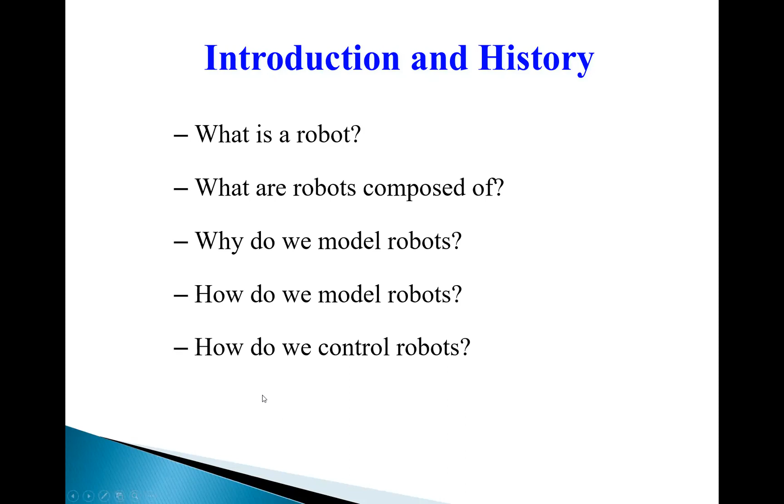What is a robot? What are robots composed of? Why do we model robots? How do we model robots? And how do we control the robot? That makes it understandable how intelligent and smart robot learning works, and how they work.

The word robot was introduced in 1920 by a playwright, Karel Čapek, a Czech playwright, in a play in 1920, and on January 2nd, 1921, the English version of it was introduced to the world, and the word robot was also introduced in this play.

Basically, after the First World War, skepticism arose after using machine guns or some equipment and high-tech systems at that time, which was the context for this play. And the playwright was going to somehow criticize that modern technology.

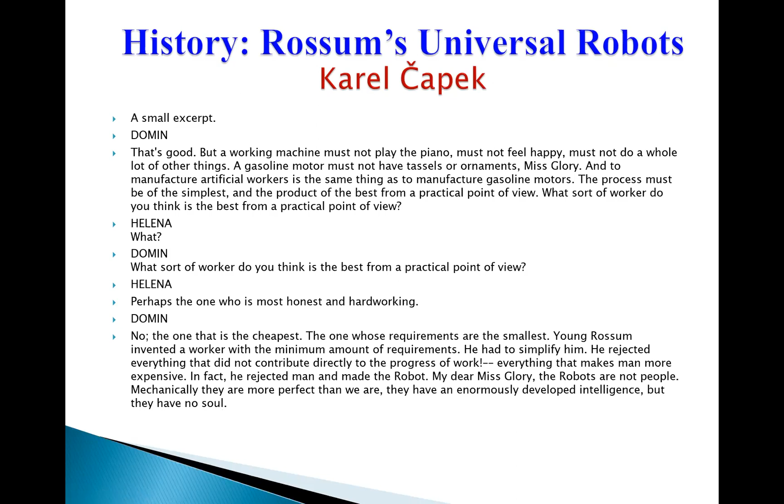This is how a robot was introduced to the world by Karel Čapek, Czech playwright and writer, in Rossum's Universal Robots. You can search this if you need more information. Recently, in 2018 or 2016, a paper was published about this play, which is still useful not only from a literary point of view, but also because in that play Čapek laid down the fundamentals of a robot: how it should be built and what the requirements are for that and how it should work. These are things that have been revisited in this playwright, and there are papers about this, continuing even until recent years.

It's most likely a combination of 'robota,' meaning obligatory work, and 'robotnik,' that served to create and introduce the word robot. Most real-world robots today do perform such obligatory work in a highly controlled environment, like factory automation, for example car assembly. Of course, this was valid 10 years ago, maybe even 5 years ago, but it's not valid right now.

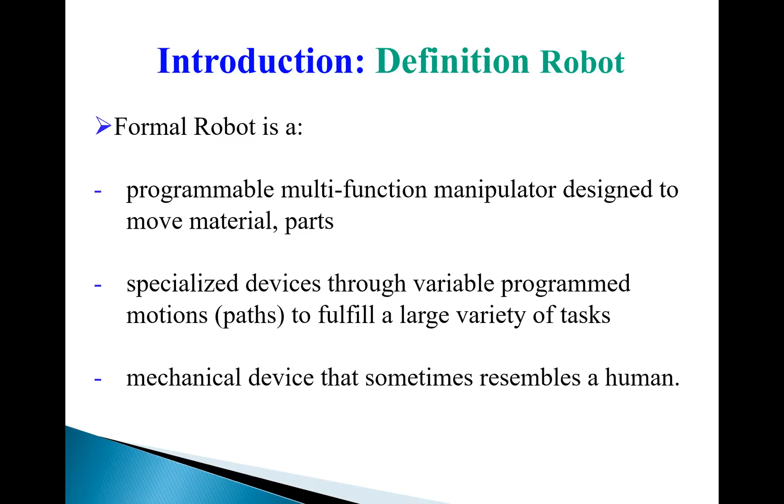It's not complete. There are many colleagues and people working in this robotic community asking for a better, formal definition to be updated and renewed. So what types of robots do we have?

Introduction to categories of robots: we have fixed robots and mobile robots. Fixed robots include parallel robots, and I will show you serial robots. Mostly in industry we have fixed serial robots used to work in industry. Mobile robots include space robots - many of you have seen NASA's Mars rovers, Spirit and Perseverance, and other types of space robots and humanoid robots.

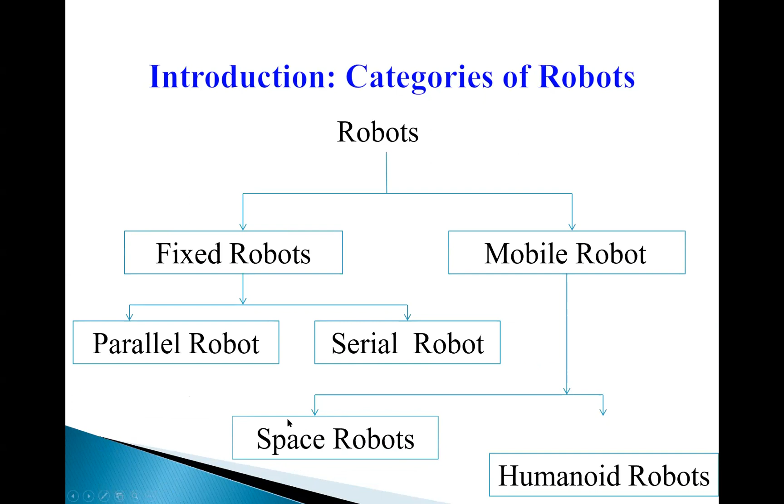Fixed robots include rigid link robots, exactly like a human arm, one hand. As you can see, most of them have 6 degrees of freedom, 6 motors, but the human arm has 7 degrees of freedom: 3 rotations in the shoulder, 1 rotation in the elbow, and 3 rotations at the wrist - roll, pitch, yaw. That's 7 degrees of freedom, but the industrial robot is 6 degrees of freedom. The Canadarm is also one such robot - it has 7 degrees of freedom, working in the International Space Station. I will touch on this: why do we need 7 degrees of freedom versus 6 degrees of freedom?

Another type of rigid link robot is the parallel robot. Parallel robot means more than one branch. Sometimes we need a robot with higher stiffness for some applications - a one-link serial robot, like a human arm, is vulnerable and can vibrate when it's moving fast.

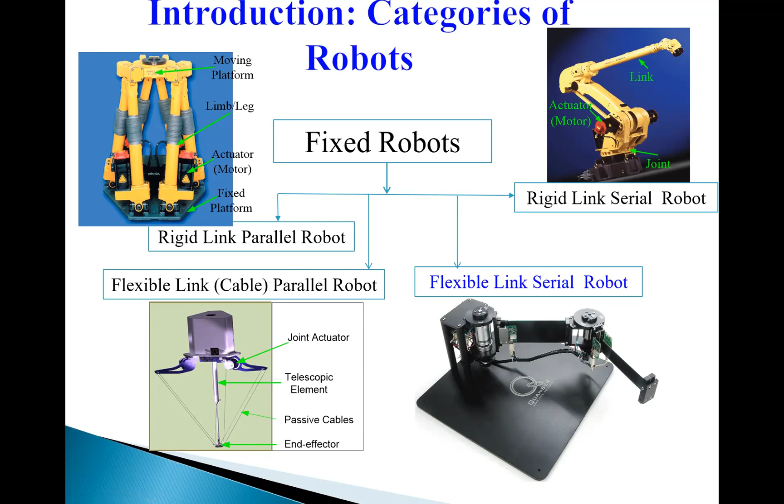What? No, excuse me. Sorry, you go ahead, doctor. Yeah, could you mute your mic? Well, I think Mr. Muhaqiq, you can mute the audience. I cannot.

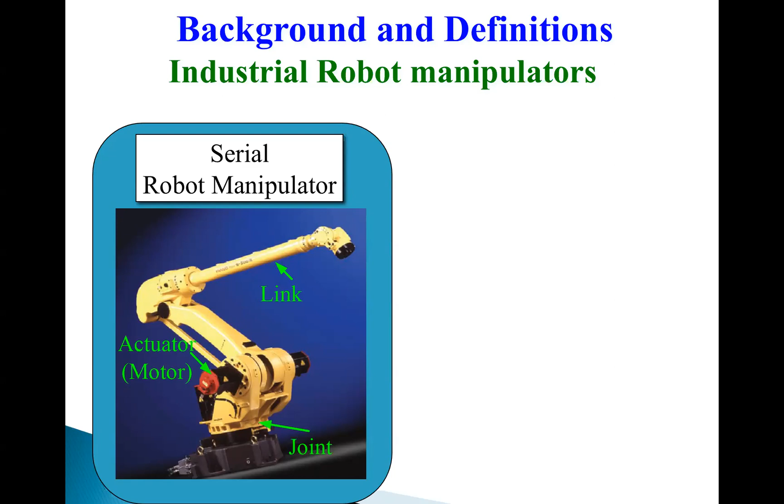This is what you have. You are more familiar in news and factories if you had the chance to visit automotive assembly line. These are the robots used in industry for pick and place, for many different applications. And this is another type, the F200 Fanuc robot. As I mentioned, this is a parallel robot, has smaller workspace, meaning the points it can reach in space is smaller than the one on the right-hand side.

We don't see the clip, Doctor. Oh, sorry.

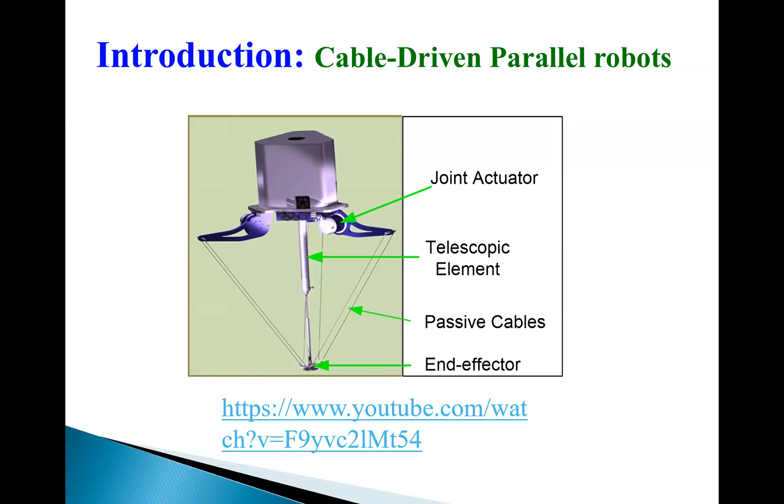Deltabot can operate at a rate of 120 cycles per minute. The motors that power Deltabot are high quality and have zero backlash gearboxes. The suction cup is one of many picking devices available. It's positioned to pick and orient objects by a central rotating shaft equipped with a universal joint. Deltabot can operate at a rate of 120 pick and place cycles in automotive industries.

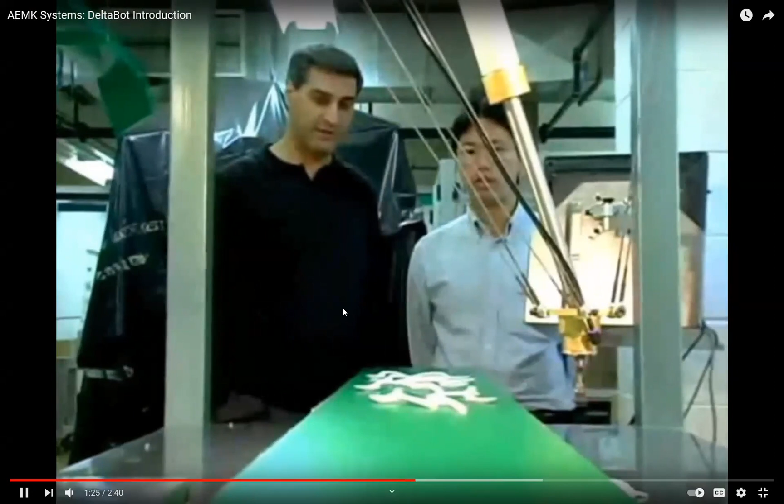You are familiar with this face, I'm sure. This is Professor Amir Khajepour. This robot is designed and built at University of Waterloo, and AEMK is one of the spin-off companies of University of Waterloo.

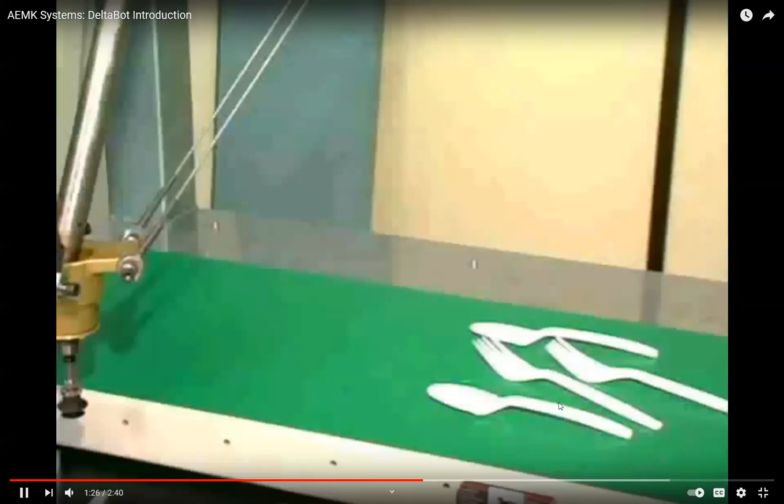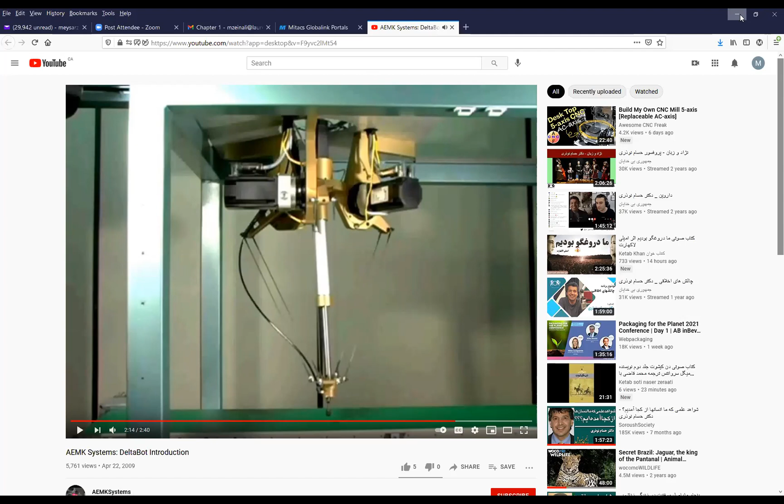You may think, why do we need to replace the rigid links with cables? For faster motion, we need lighter moving mass. That's why researchers started replacing the rigid links with cables. And also, another motivation behind this cable robot is to have a much larger workspace.

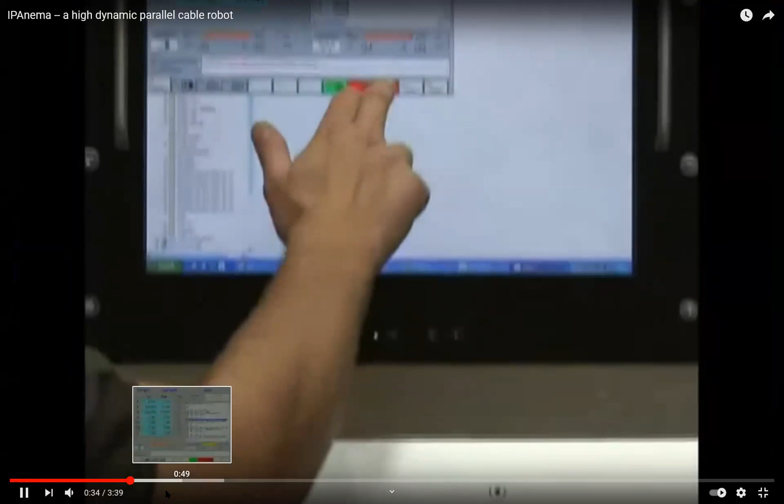You can see this is another type of cable robot. This covers a 100 by 100 by 100 meters workspace, and it's designed and built by Fraunhofer for installation of solar panels in a big project.

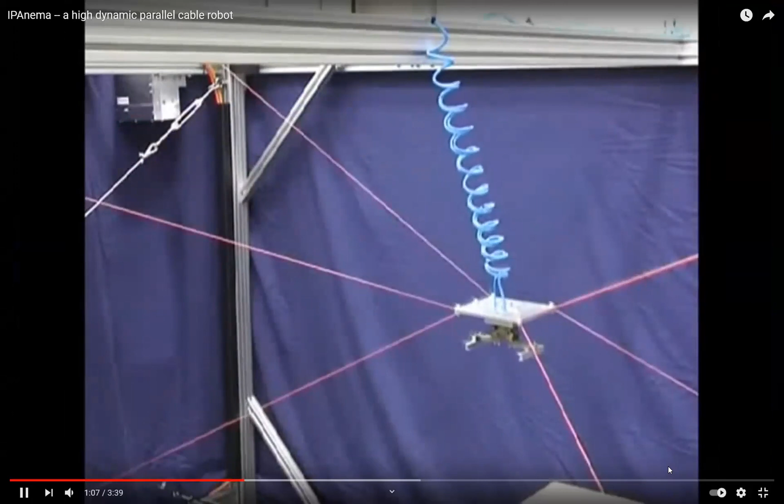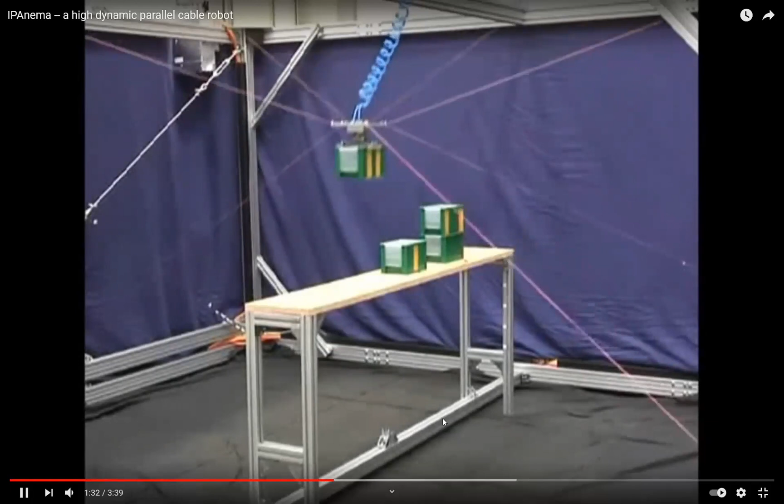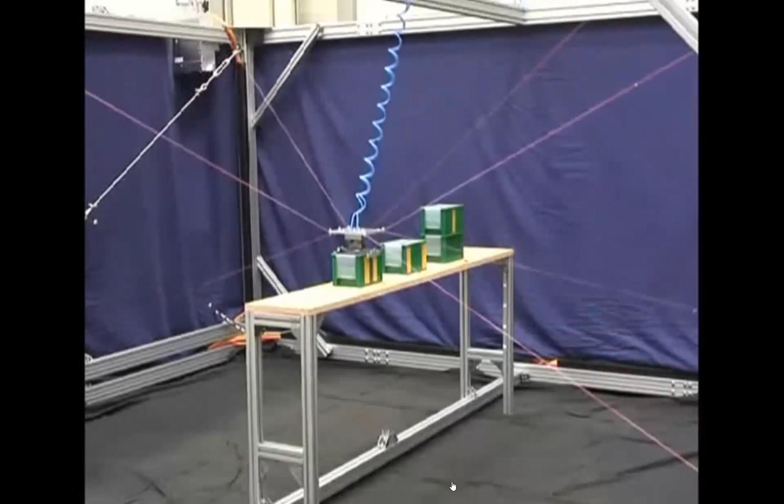You can see that all the links are cable, and control of this robot is quite difficult, but despite having very flexible, hyper-flexible links, you can see that there is no considerable vibration. The robot can pick and place and do the same job the rigid robot used to do, but can cover a larger workspace, meaning the area the hand of the robot can reach is much larger than the rigid robot.

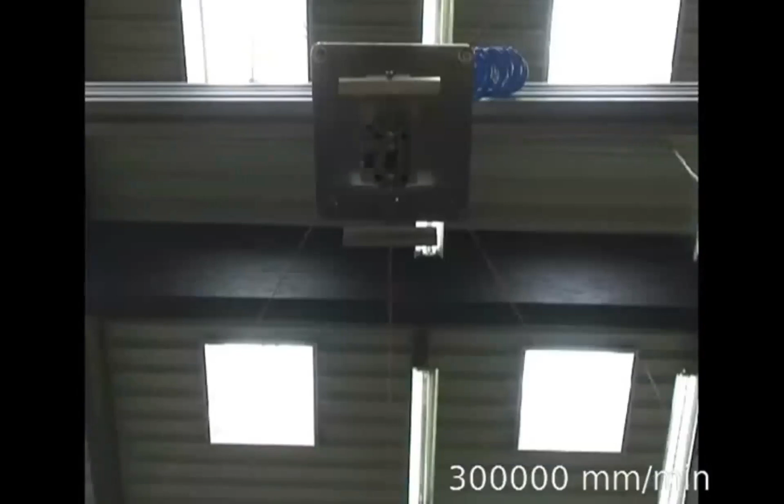You can see here how fast it can move, and please see there is no vibration. The hand is not vibrating despite the very high speed, which is not possible with rigid, heavy-link robots. That's why the rigid links are replaced with cables. But winding and releasing the cables is more difficult and makes the control more difficult.

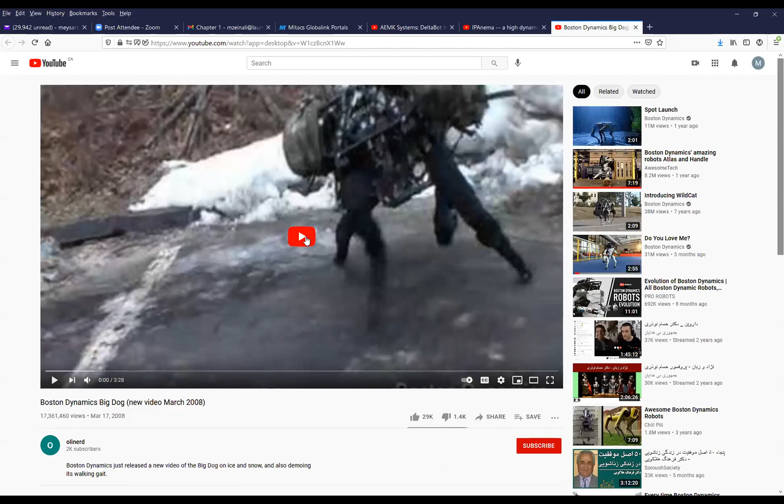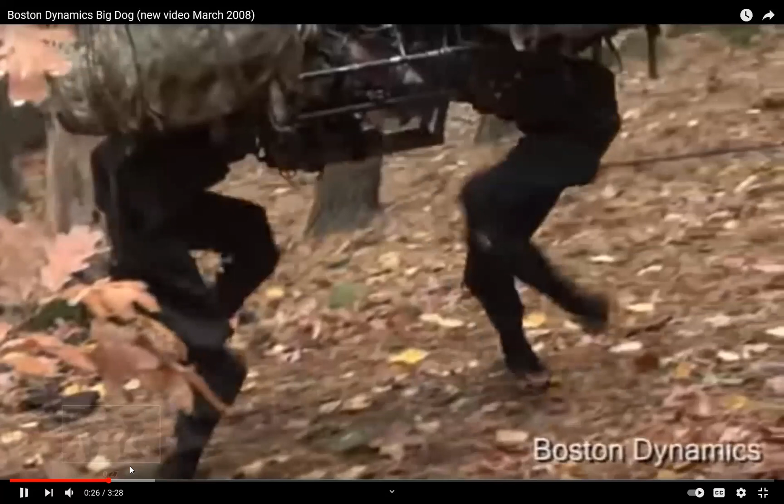Four-leg robot, but please look at the legs. Each leg is a two-link robot. That's why most of the experiments in many robotics labs are conducted on two-link robots. We test our controllers and algorithms on two-link robots, and we verify whether it's working or not.

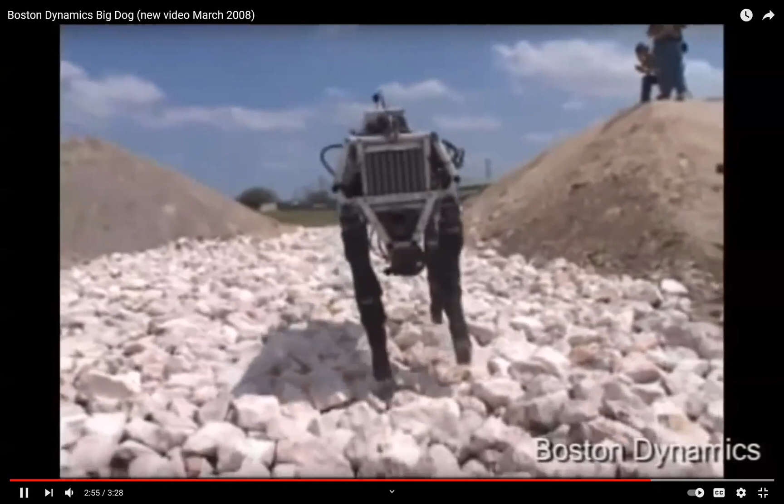You can see it can carry 150 pounds - the early version of this robot - payload on very rough terrain.

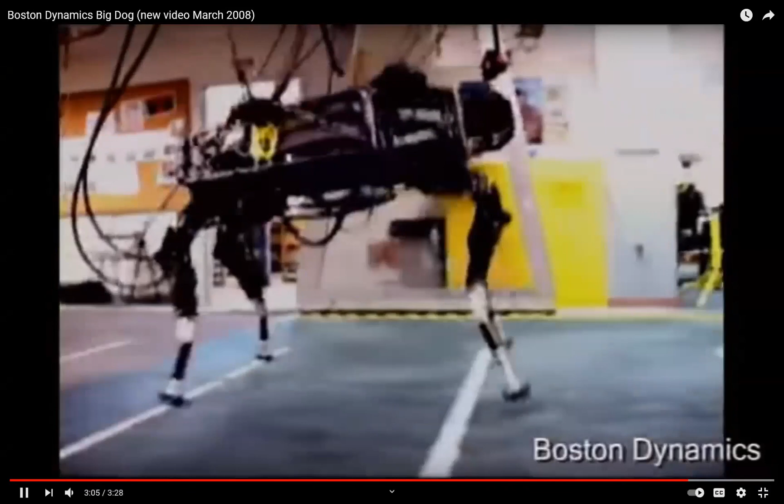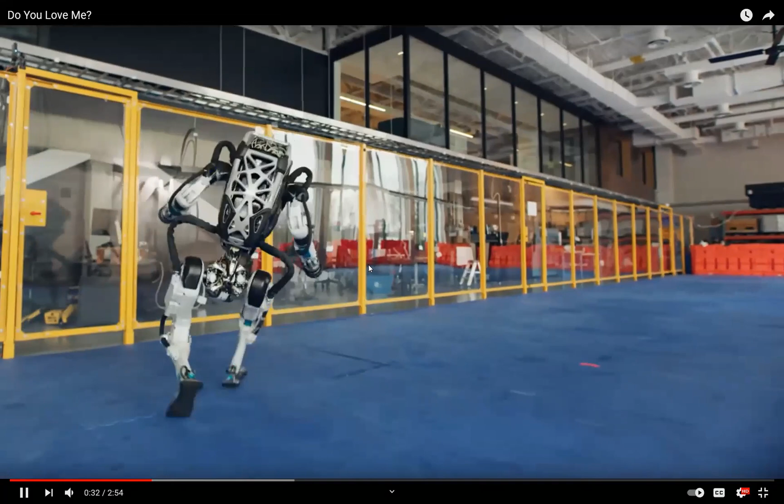Another robot built by Boston Dynamics. The main question is how this robot learns different motions, or how they work, and how we train this type of robot.

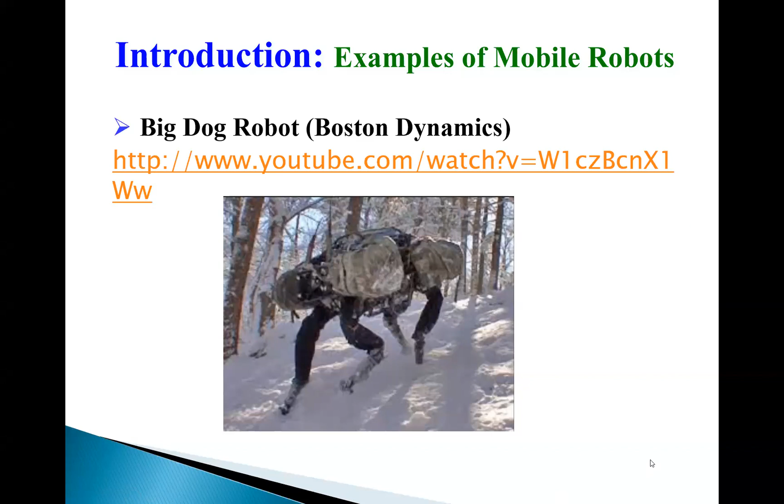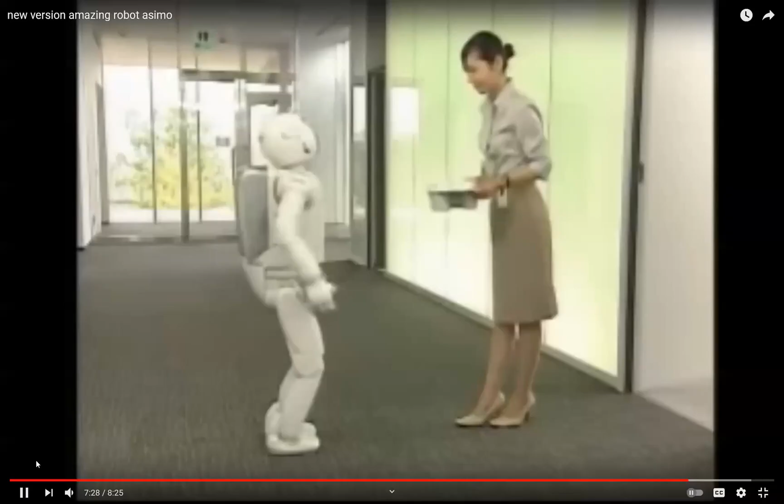You can see how it's moving. It can run by 5, 6, and in the current version, I think it can run at 9 kilometers per hour.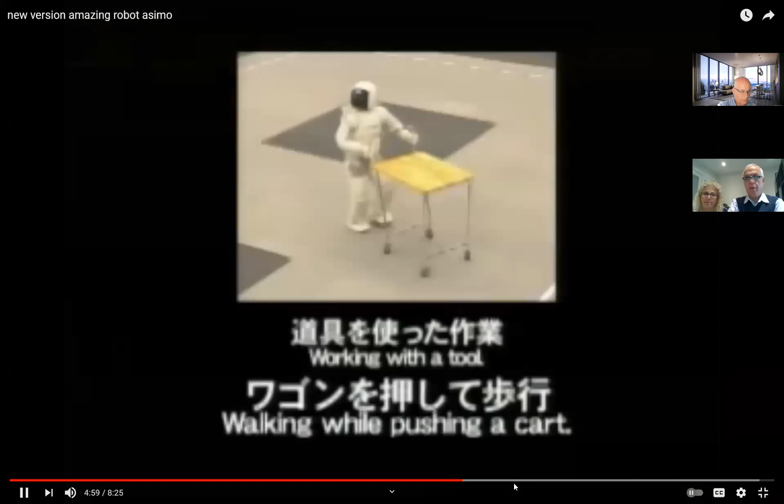It can serve in office, at work, and for elderly people in hospital. So it has a variety of different applications, many different applications it can be used for.

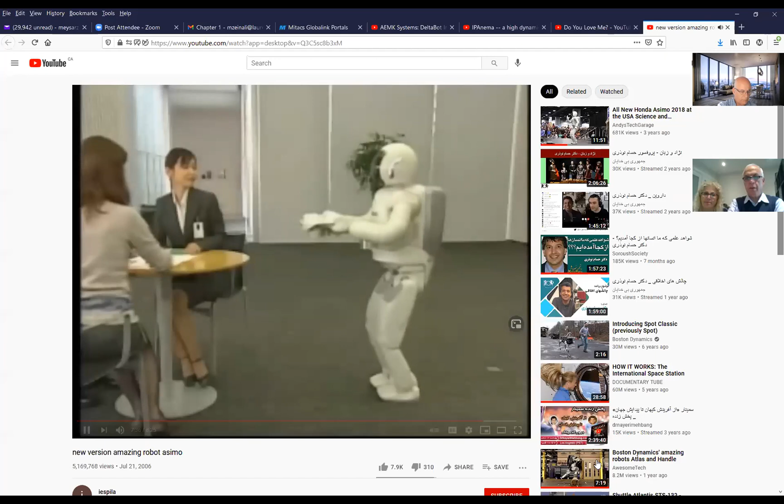This is one of the advanced humanoid robots.

This is another type of humanoid robot. Please let me turn off my...

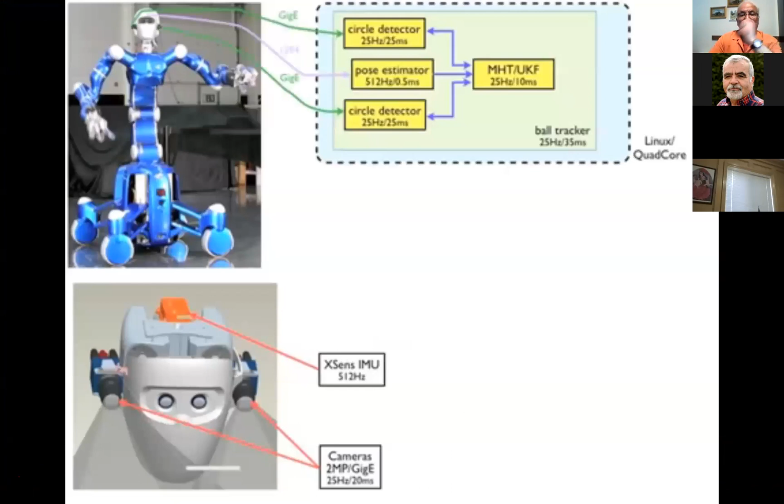And an IMU measures the 6D head pose to account for not completely cancelable vibrations introduced to the robot's lightweight structure due to the rapid catch motions.

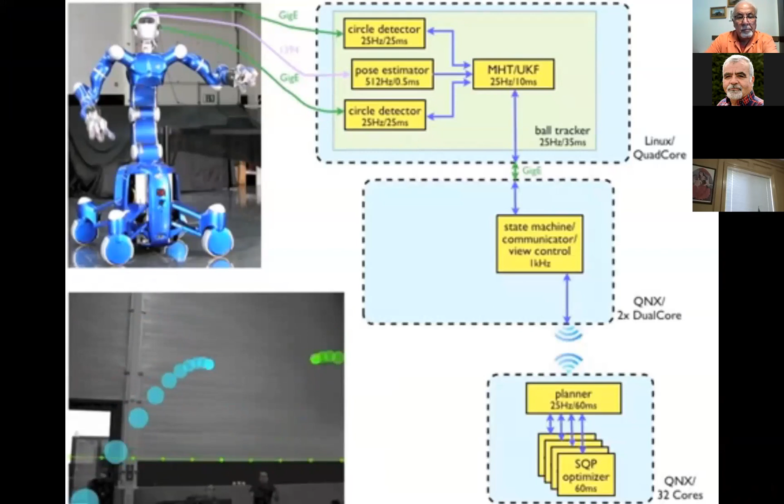Based on the continuously improving trajectory predictions, a real-time path planner running on an external cluster repeatedly decides where, when, and in which configuration to kinematically optimally catch the ball.

When it predicts where the ball is, it intelligently takes a look at that. Then there is a process we call inverse kinematics. At that point it's converted to joint angles, and the robot actuators then run the arm, different parts of the arm, to the point to be able to catch the ball.

First, the point is predicted, then the X, Y, Z location is mapped to the joint space, which we call inverse kinematics. And by that, we can find the angle between each joint with respect to the base joint and shoulder joint.

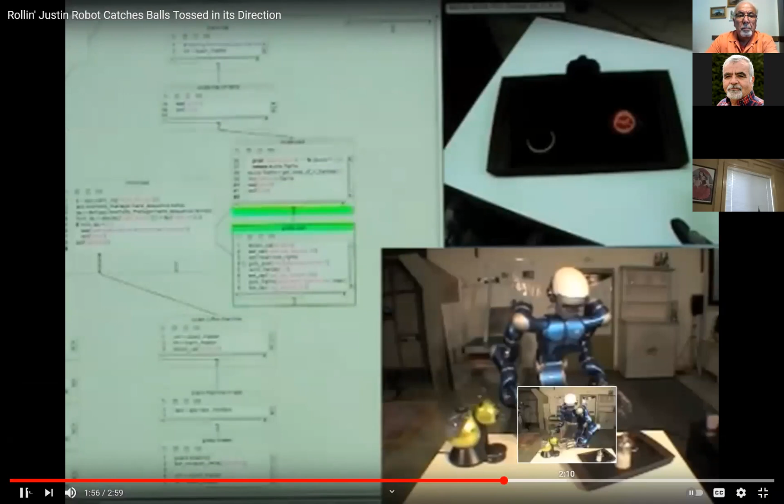Only unmodified real-world objects are used. This compensates for insufficient vision accuracy, torque sensing, and gravity model. This is a requirement to be able to exactly measure the pose of the hand for later reinsertion of the drawer.

Using this strategy, the grasp can be executed even in case of huge uncertainties. This control allows handling even very light or soft objects.

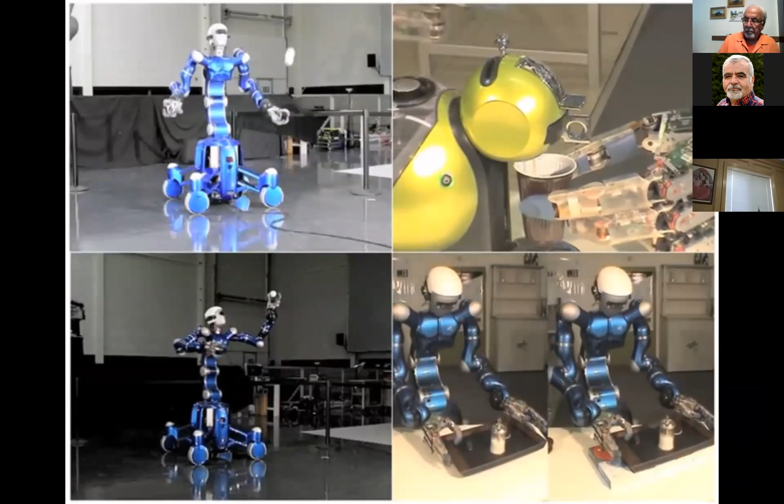The versatility of Justin is achieved by pairing performant hardware with intelligent software. That's where we need intelligence, and we need artificial intelligence.

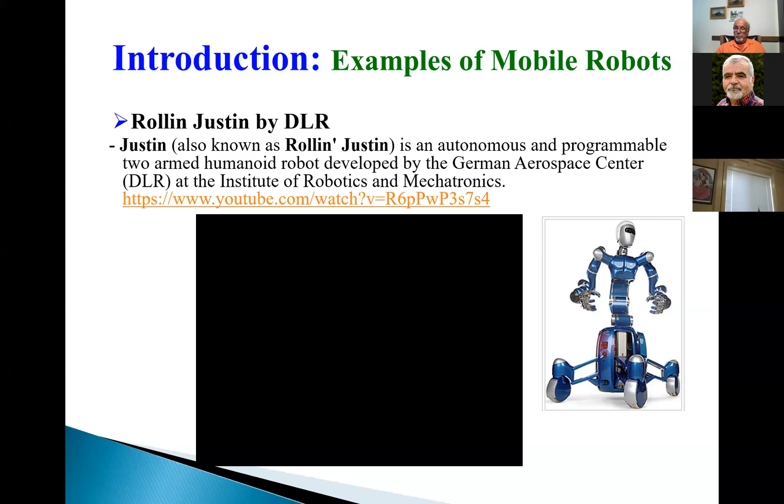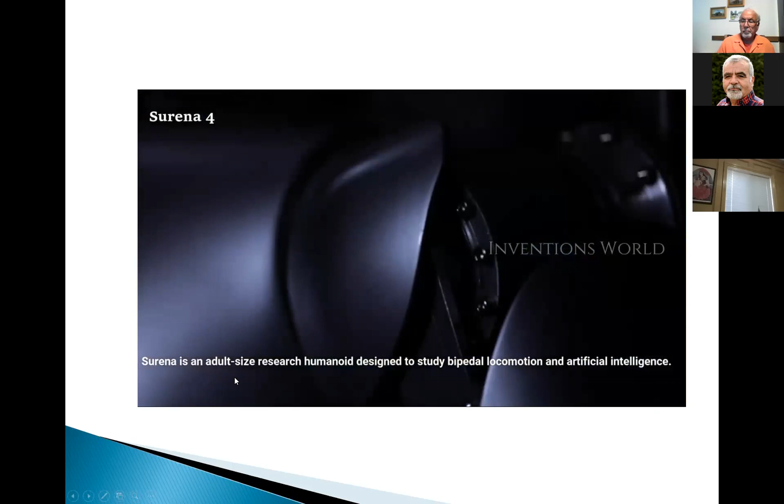It's interesting to know that the Engineering School of Tehran University also developed their own humanoid robot. I don't know whether you are familiar with this robot or not. Surena is an adult-sized research humanoid designed to study bipedal locomotion and artificial intelligence. It's also being used to provide entertainment at special events and to attract students to careers in engineering.

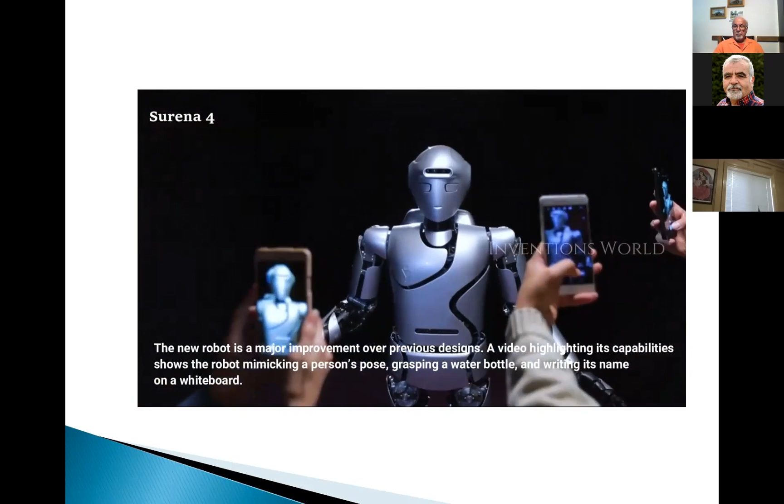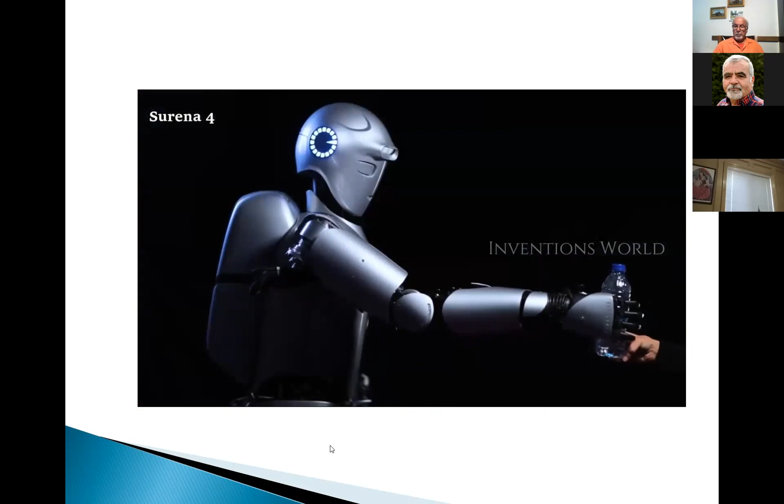A little over a decade ago, researchers at the University of Tehran introduced a rudimentary humanoid robot called Surena. An improved model capable of walking, Surena 2, was announced not long after, followed by the more capable Surena 3 in 2015.

It's interesting to know that the Tehran University robot is also built by Professor Yousefi Koma. He was one of my classmates at the Engineering School of Tehran University, and it's almost as advanced as its counterparts in Japan, Europe, and the US. So it's interesting to know that.

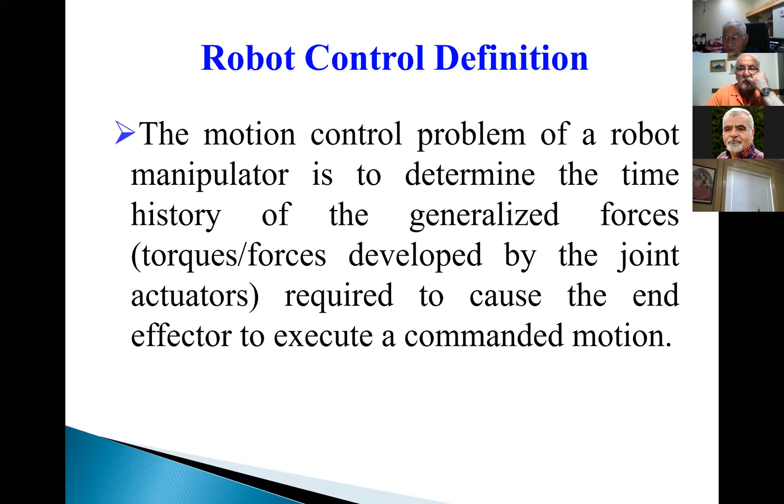How does a robot learn? The motion control of a robot means to calculate the voltage or current we have to apply to the actuator motor of each joint to move the joint. So this is the basic control algorithm. We have a controller, actuator, system, DC motor for example, robot sensors, and controller. The red box is the controller where the algorithm, AI-based algorithm, and classical equations make the robot make a decision.

It goes to this box, and based on the difference calculated between desired and reference and the actual output of the robot, it is error-based. In classical method, it's error-based. Error-based means you have heard of PID.

PID control is like a human, blind or visually impaired person. By knocking the stick, he can find his way. When someone knocks a stick and can find his way, that's the kind of controller we used to use. But...

Artificial intelligence based or model based control is as if you have eyes and you can see and decide, and you can recognize the face, recognize the path, and move along that path.

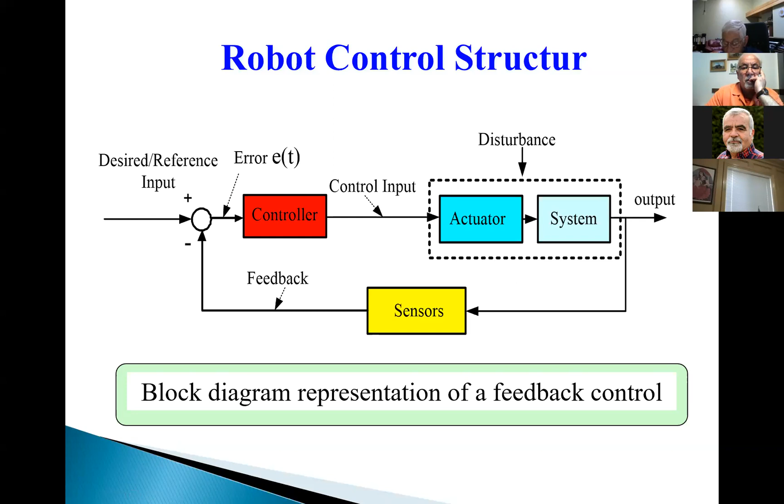So generally speaking, a control system is a system designed to make the output of the system behave in a desired manner. As you control your car when driving on the highway, you have cruise control, and new cars have lane assistance systems that help you drive inside the line.

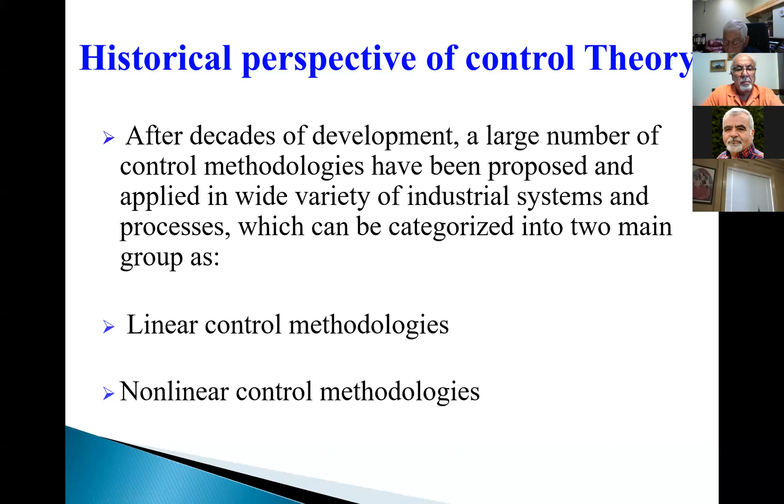After decades of development, we have two important categories: linear control methodology and nonlinear ones. A paper published in 2000 shows that a linear controller like PD, an old version classical controller, performance is the red line, and the desired one is a circle.

We ask a robot hand to draw a circle, or to do piping or welding of a pipe, and these are the results. The blue one is the desired path, the green one is computed or model-based, and the red one is the old version PD or PID controller.

That's what is the motivation behind using AI: to go from the red line to the green line, or even have better performance.

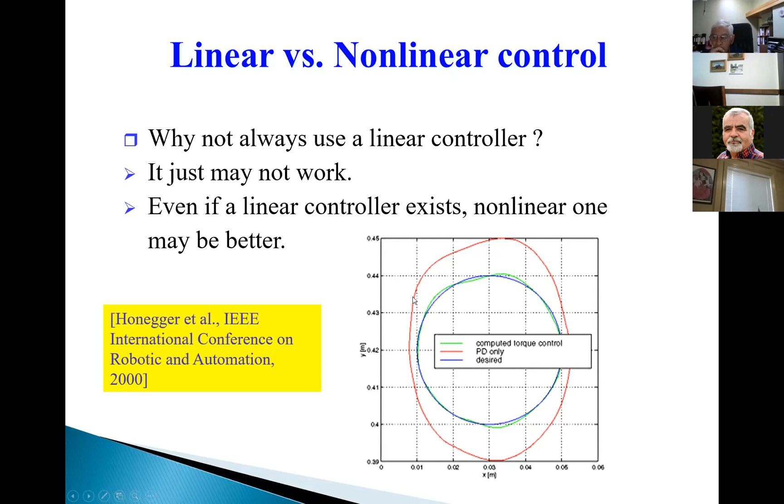Then you may ask how robot manufacturers were doing before 2000. They built CNC machines since 1941, Second World War, and then robots in 1960. But how could they achieve higher accuracy? This is the secret robot manufacturers used to use.

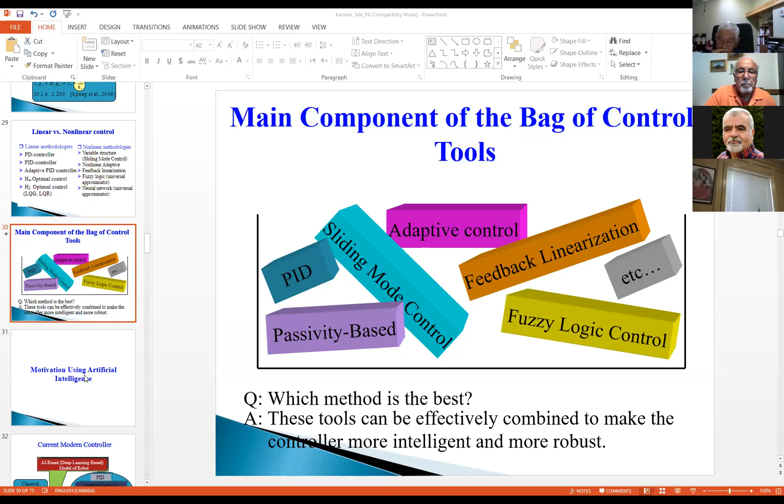So the main component of the bag of control tools a control engineer could use was one of these methods, but it was, I would say, not sufficient or good enough for high speed robots with low gear ratio, with a smaller KR, like one to one. Then this term becomes too large and you cannot control the robot to the precision you need.

This is the motivation for using artificial intelligence. We decided in the control community to add a model-based component to the error-based one, which is similar to a visually impaired or blind person finding a way and moving. By adding this knowledge-based, model-based component, we can predict, because based on the model we can predict.

This is what we have in robotics: a differential equation, a vector, matrix, a big equation. For a 4 degrees of freedom robot, we got like 16 pages of equations, but at the end we were able to predict only 20% of the actual behavior of the robot, not more than that, because we don't know exactly the friction, we don't know the uncertainties, we don't know so many unknowns.

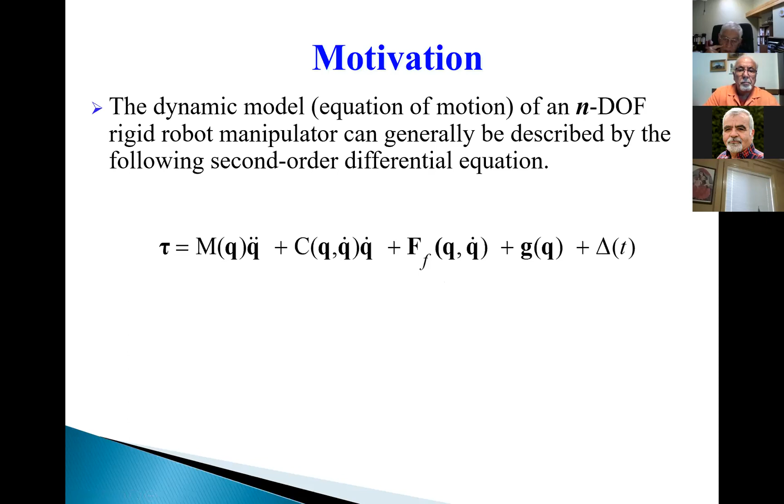But how do smart and intelligent robots work? Robots, like humans, have two types of intelligence. Cognitive intelligence, which allows humans to recognize a problem and figure out how to solve it. First, you have to know the problem and attempt to solve it.

And the other intelligence is motor intelligence, which allows humans to control body motion without thinking about it, whether walking or jumping. This is the second type of intelligence. First, we try to solve this motor intelligence, how to move our hands, legs, and body with good accuracy in different situations, and then cognitive intelligence to find out.

I would say we are mostly done with motor intelligence for robots, as you've seen with the Atlas robot, which can dance, walk, and jump. The human approach to dealing with complexity is a continuous, long-term learning approach. Therefore, there is a pressing need for robot control systems that are able to learn systematically and efficiently.

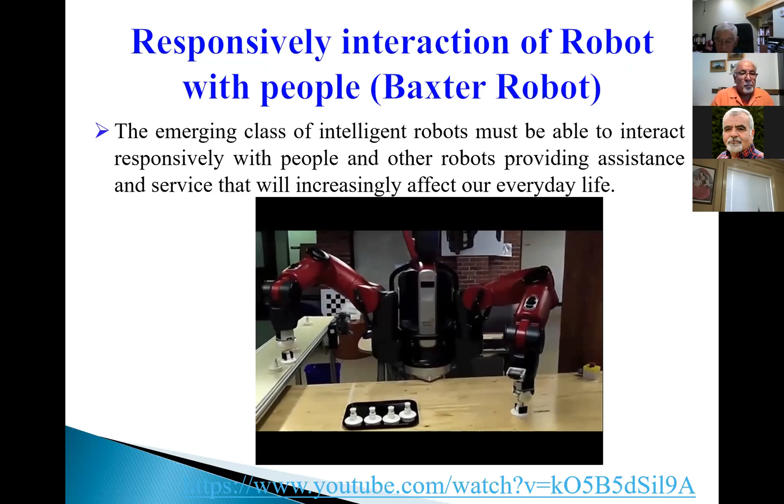How do they learn? This is one of the advanced, human-friendly robots, and it can interact with humans.

Hi, I'm Mike Bugner. I'm the product manager for Baxter here at Rethink Robotics. Today I'm going to show you a quick demo of the ease of use. You can see this robot is working not inside a cell.

The human is standing very close to this robot because it has force control. If it touches the human operator, it's not going to hurt someone. It has a force control system and will not apply large force. As you can see, it can touch the paper cup. Very easy to use, very compliant to the user, and it exhibits a certain level of interaction and collaborative friendliness that makes it easy to understand and introduce into a manufacturing environment.

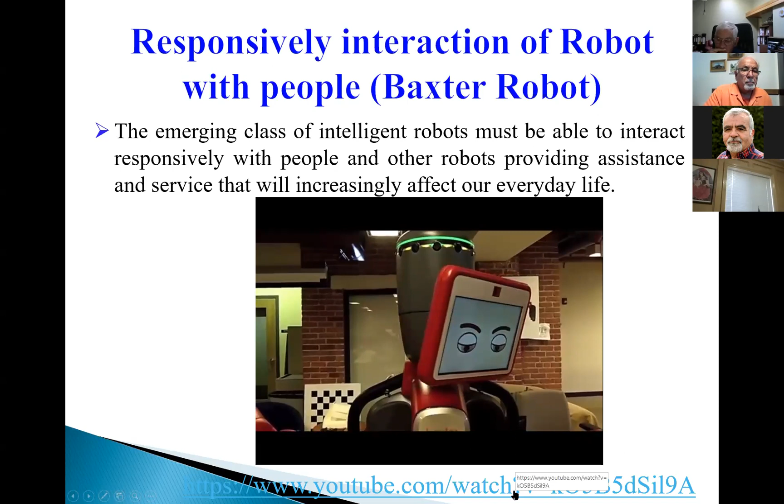If I just grab its arm, Baxter brings its head around and says, "Listen, I know you're there. I'm ready to be trained, and I can show you that I can do some tasks for you." So just to show a quick demonstration.

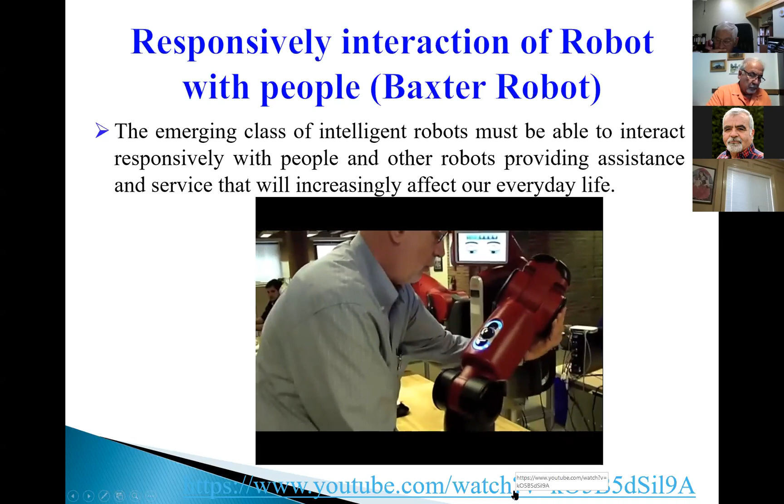One type of training: the operator moves the hand, and the robot knows where the hand is, and it can right away record and repeat it. This is one type of learning.

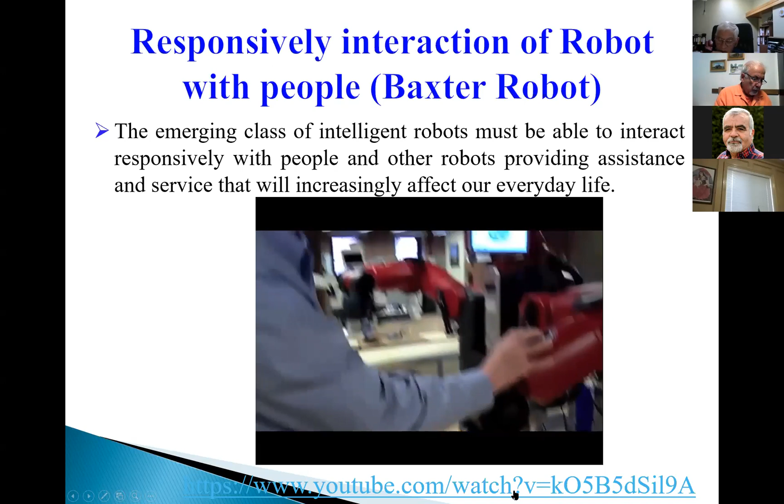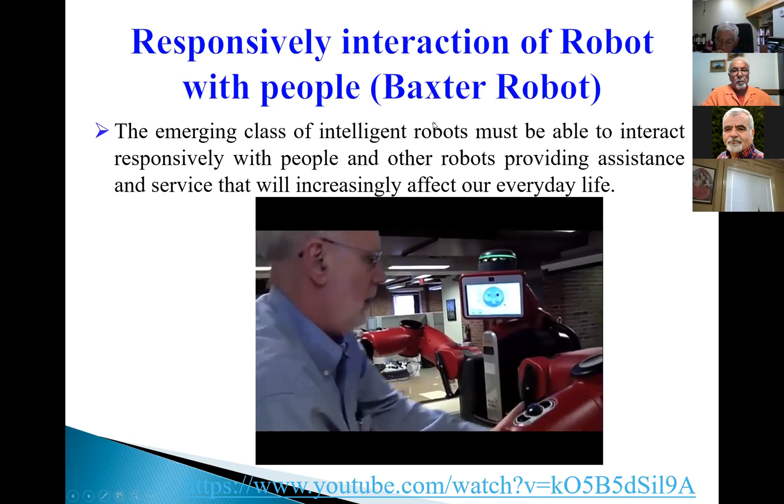If you are interested, you can watch on YouTube. The name of the robot is Baxter Robot.

Robots should be able to learn by interpreting complex sensory input, what is coming from the camera, what is coming from the laser system, what is coming from the sonar sensor, and other types of sensors. From demonstration, we can show how to assemble a system, then the robot can watch and learn how to do it in supervised and unsupervised fashion.

Unsupervised fashion means that we, as a human child, drop a cup and break it, and we learn from that. For example, if your parents are not teaching you how to do it, then you hurt yourself, you drop a cup and break it, and you learn. That's a type of unsupervised learning. You learn from your own experience.

Historically, industrial robots involve little or no learning. But you just saw the Baxter robot, and it can learn.

A successful employment of robots in unstructured environments, such as hybrid automated manufacturing, means human working hand in hand, operator working with robot, or in a home environment. Most of these humanoid robots are built to deploy in hospitals or elderly homes, to help elderly people stay in their home and not have to go.

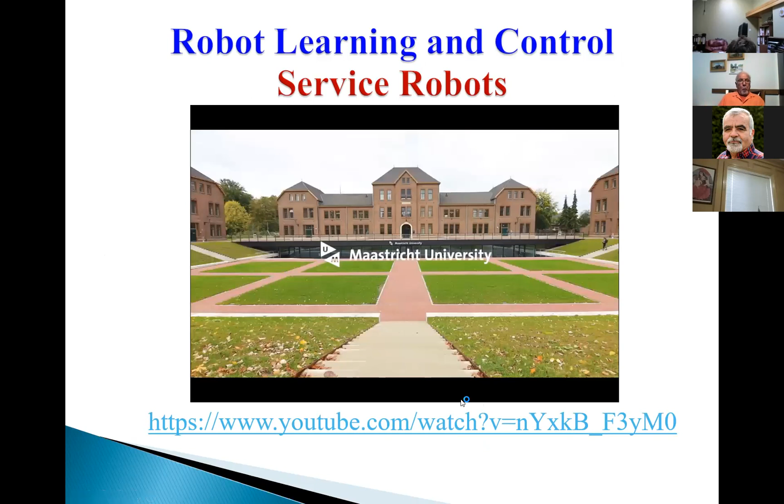Please take a look, you can see this service robot.

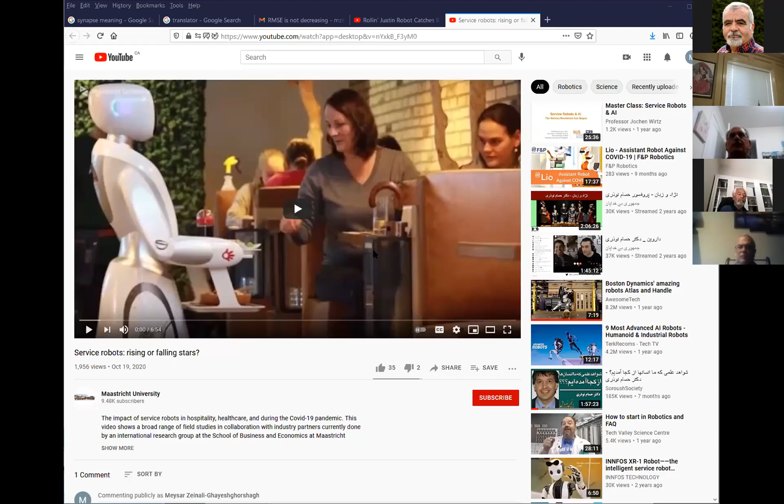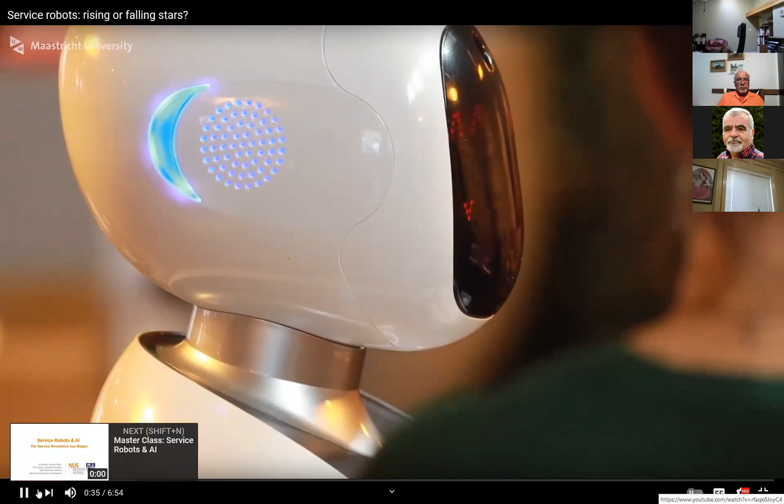Elderly homes, airports, industrial plants, or in a restaurant where, while you're having a chat and debate with friends, there's suddenly a robot standing in front of you. You could tell there was like a wow experience going on.

Other people smile at the robot or even embrace it and take a selfie with it, but we don't know what this does to their behavior. Do they buy more? Do they return to the restaurant? Do they tell their friends that they had a positive experience?

And that's why Gaby, professor at the School of Business and Economics at Maastricht University, thought, well, let's do some research on it. How are people responding, acting, reacting, and interacting with robots?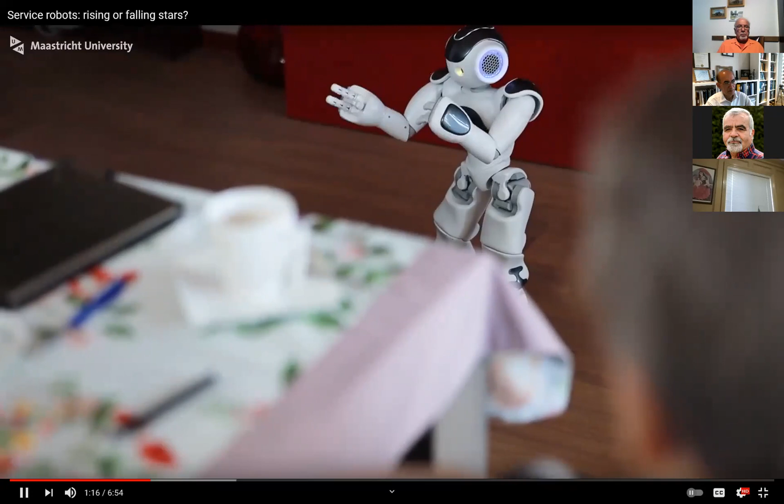And societal relevance, because that is what Maastricht University wants to do.

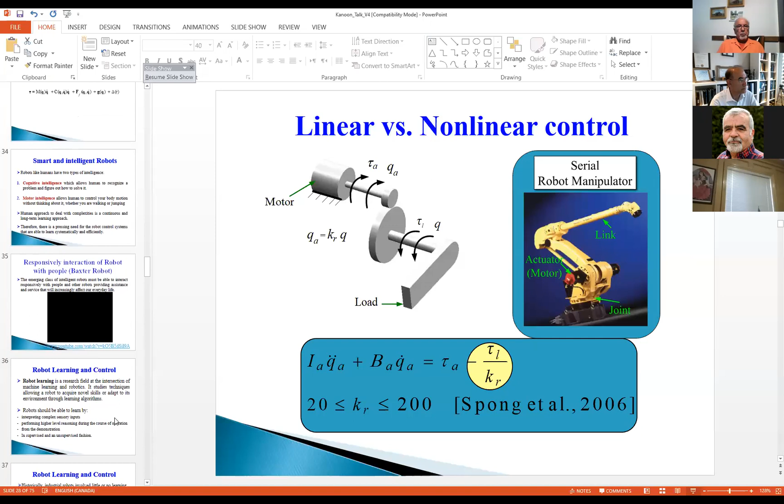How they learn, this is important. The motivation behind studying artificial neural networks, commonly called neural network or neural net, is to build an algorithm whose construction would mimic the organization of the human brain. This is a control system. It's interesting that these topics are taught at the computer science department, mechanical engineering department, electrical engineering, robotics, and this is a control system, and also in the math department.

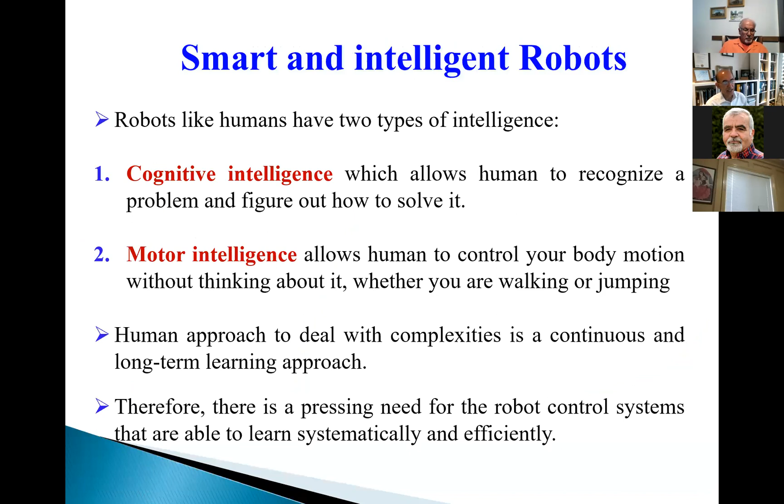That is one project. Another project applies the deep learning model to control the motion of the robot carefully in the presence of disturbance. You can see that we hold the link or joint of the robot and then release it.

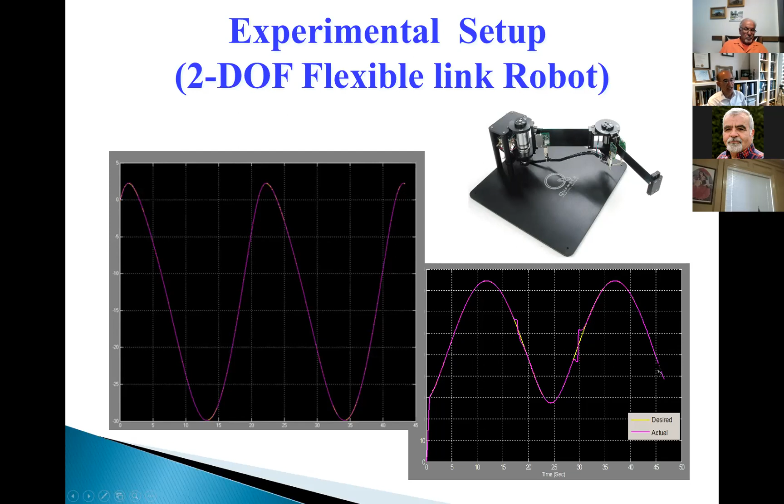Still, you can see the pink line, it can come back and continue on this sinusoidal path and move along this path. It's very important in the robotic community that after you apply a disturbance, it can carefully follow this.

After the result of this basic neural network system published in 2002, I published several papers on that topic. Then recently in 2018, we combined several different neurons as the human brain has. What we understand so far is that the human brain has different regions responsible for different actions and functions, like some part for speech recognition, some part for image analysis and recognition of people, some part for body motion. That's how we try to mimic that idea, train with different sets of data, and implement it on the robot.

We got very promising results, but we still had a problem: this type of network could forget, and each time it faced a new trajectory or new task, it somehow had to start learning it again. This is not safe if the robot is interacting with humans or working at an elderly home or in a hospital. It's not good to start from scratch.

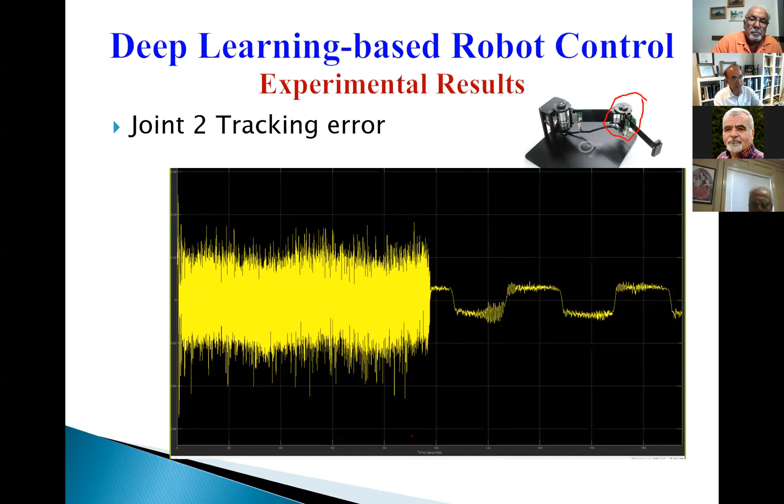For the elbow joint, you can see we have vibration at the beginning, very high frequency vibration for this part, because it's a very flexible robot. When it moves with high speed, it starts vibrating, but after 80 or 90 seconds the vibration stopped and we could control it. Still during the vibration, we have a reasonable accuracy.

You can see it's following the sinusoidal trajectory, which for those familiar with Fourier series, as many of you as engineers know, any periodic function can be converted to sinusoidal function and step function. For non-periodic function, we can use Fourier transform instead. So any function can be represented in terms of sine function and a constant.

That's why we test our robot with a sinusoidal function. If it can follow a sinusoidal trajectory and a step trajectory, then it can follow any other complicated trajectory.

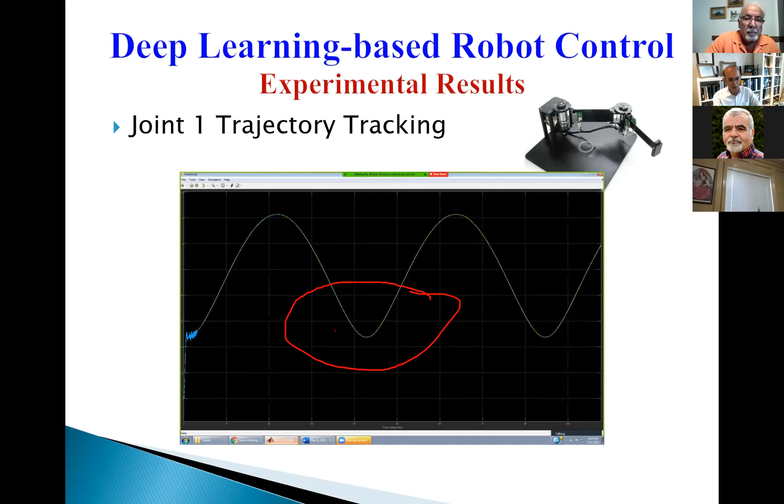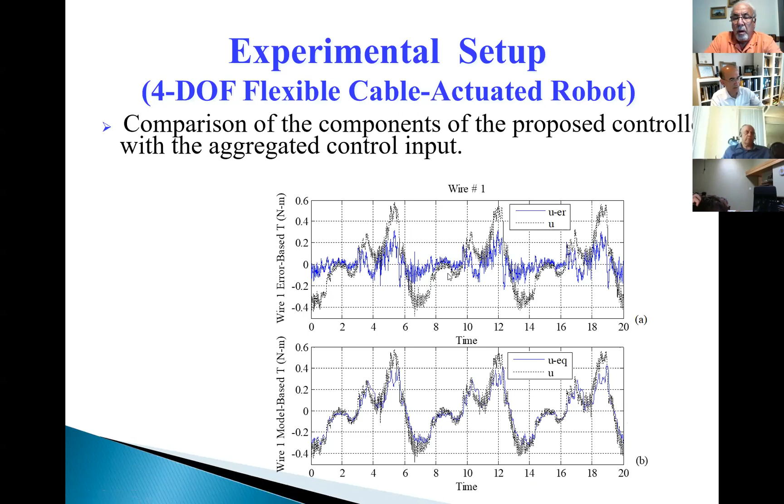Sure, thank you so much, Dr. Zain Ali, it's a very interesting presentation, I enjoyed it. Actually, my question is related to the application of AI and robots in the agricultural field and practice - how far along is it, and if there is any. Thank you.

Would you please repeat the last part? Yeah, that is my question, related more on application of AI and robots in the agriculture field. Okay, I got it. And practice, right.

Thank you. I remember your area is agriculture. Already many robots have been developed, equipped with AI for cherry picking, for example, for fruit picking, for packaging.

Packing, for packing. Our Delta Bot is working in agriculture farms. Delta Bot was developed by Professor Khajepour at University of Waterloo. It's already working in a farm to do packing, with very advanced image processing, because of advances in AI and deep learning.

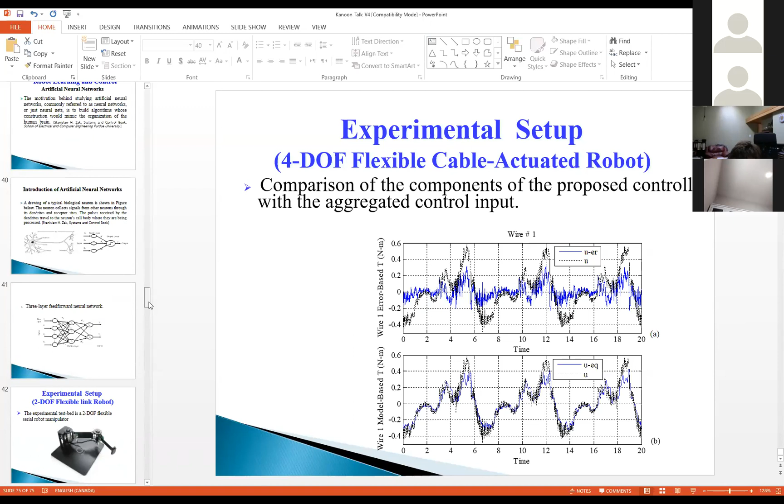Look at this, excuse me, let me show you this before I comment on that. I have this video, an interesting talk called Meet Sophia. Look at the Sophia robot. One moment, let me... I actually saw this one before but didn't realize exactly the voice. No, that would waste our time. One moment, I can run it from YouTube and go to the point where you can see what tuning the Sophia robot has.

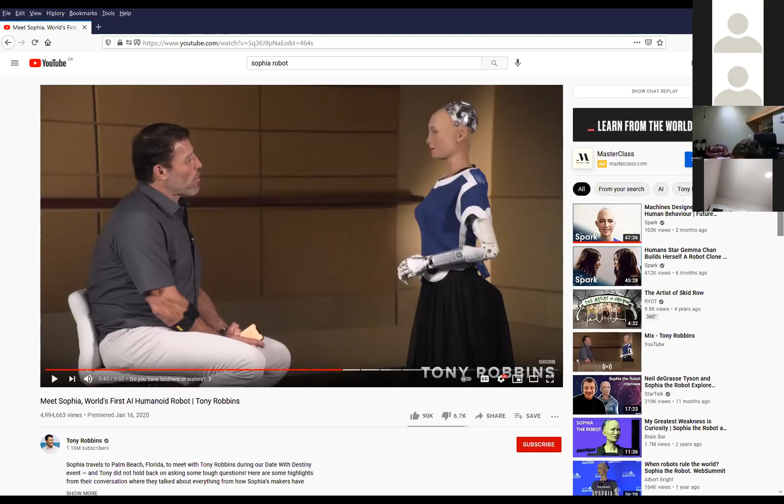Yes, it can mimic when you laugh, when you are angry, like your dog. Those of you who have a dog know that your dog can easily understand when you are not happy, when you are angry. And of course, the level of intelligence of a dog, from some point of view, is more advanced than a robot. But a robot can look at your face, and if you have some reaction, because a robot can recognize your face - the recognition right now uses 72 points.

Eye points, your eyebrows, the tip of your nose, 6 points from your lips, your mouth, chin points, and the distance of these points from each other. If we give the photo of myself or yourself and say this is Mr. Afshari, this is X and Y, then if the robot sees you in the street somewhere, right away it can understand you. But if it sees someone it has never seen several times before, that's called unsupervised learning, and it can figure out from the face, from the motion, it can identify and learn about you. Next time, if the camera of the robot sees you, it can tell that you were angry at that time.